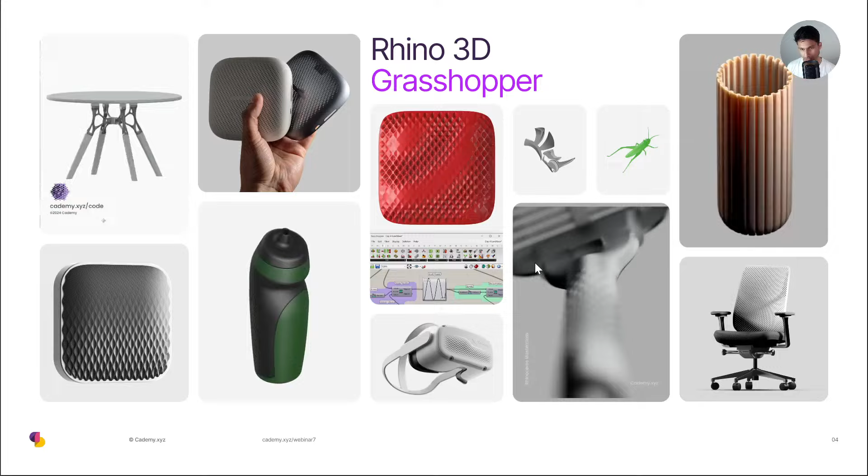Let's get started. So let me quickly introduce myself for anyone who's joining for the first time. I'm Aman, I'm from India, and I've been living in Spain for the past 10 years. And in these past 10 years, I've been using Rhino and Grasshopper as my primary CAD tool. And I help design teams create parametric textures on their products. So I've worked with BSH, Logitech, PA Consulting, and other companies to help them design certain textures on their products. And whatever I gain from doing these projects, I share with you guys over at Cademy.

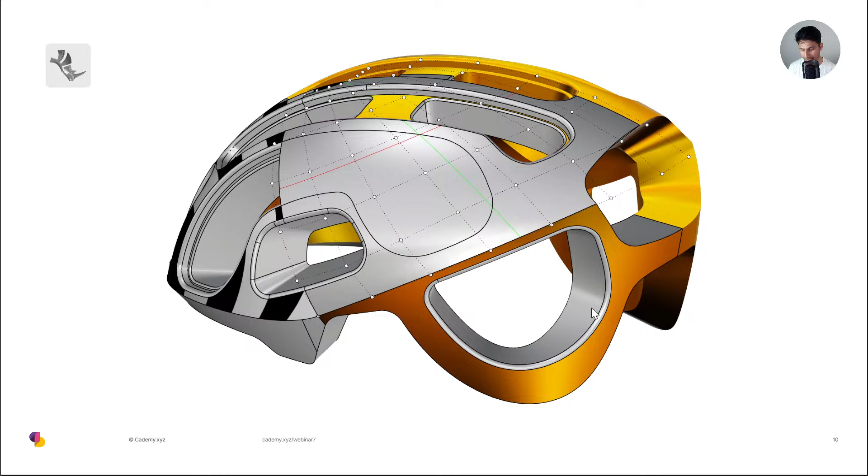Okay, we will try to create single span curves and surfaces. We will use trim and join approach. Towards the end, we will convert this model into a solid model. And after that, we will use Grasshopper and import this solid model so that we can populate it with a voxel field and then replace the voxel field with a gyroid lattice structure. We will also see how you can thicken it and then how you can export it for 3D printing in

STL format. Okay. After that, if you use Keyshot for rendering, we will import this helmet plus the gyroid structure, and I'll show you how you can do a cool reveal animation in Keyshot. Okay, so I hope everybody's ready. All right, so let's get started.

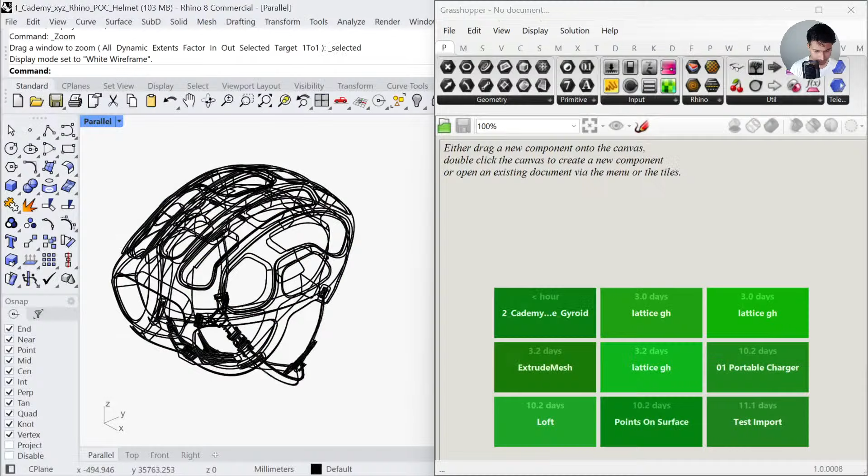So the first thing that we will do is open Rhino. I need you all to install 2 plugins. Okay, so let me open my Rhino environment. Just a moment. Okay, and we will head to the command bar and just type package manager. This is gonna pop up the package manager. Now these 2 plugins that I'm telling you are optional. You don't need them to follow the webinar, but they will be very useful if you want to quickly evaluate the continuity criteria of your surface, and later on when you're creating the lattice structure to smooth out the mesh object.

So the first plugin that we will download is called Global Edge Continuity Tool. So just write global and you will be able to install it. Yes, the exercise can be done in Rhino 7 without any problem. I have exported the file for Rhino 6 as well. Let me know if you're not able to open the file. We have a lot of time, so I can export it again just in case. But I remember I exported in Rhino 6.

Okay, so once you install the Global Edge Continuity tool, let's also look for another plugin called Weaverbird. Okay, so this is a plugin for Grasshopper. Okay, so let's press install as well. Alright, so once we have installed these two plugins, we need to restart Rhino, so that these plugins can load in the Rhino environment. So just close Rhino and then restart it. I have already installed, so I don't need to do that, but please go ahead and restart your Rhino environment. So we will use the Global Edge Continuity to check the continuity between surfaces, and then we will use Weaverbird to smooth out mesh objects.

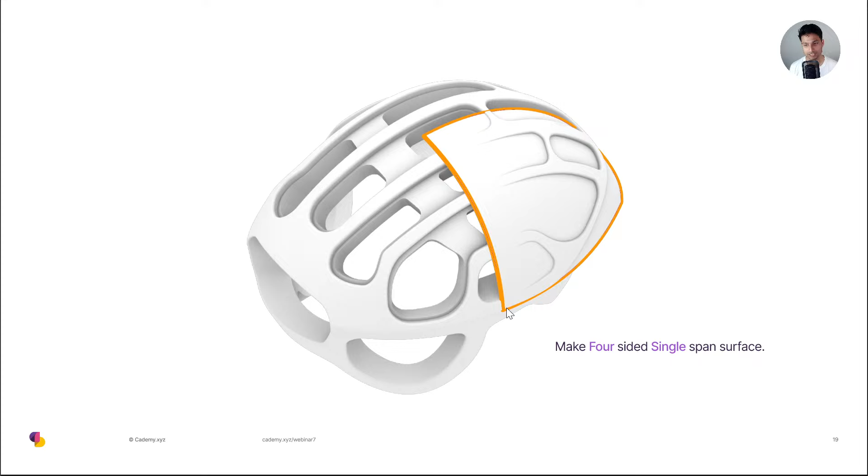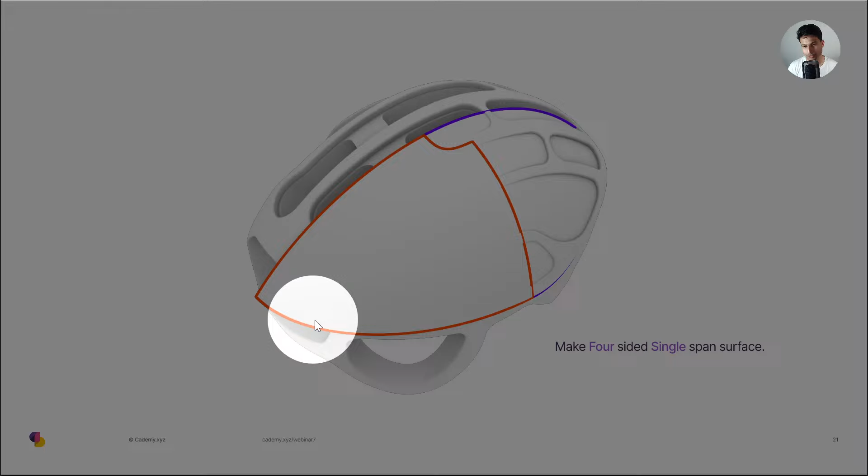Okay, and every time we are dealing with a 3-sided problem, we will try to convert it into a 4-sided problem. So here you can see, if I had to create a surface here, I had only 3 sides, one at the bottom, one in the arc, and the other side is here. So what I will do is create a new side here, and then I can convert this into a 4-sided problem. 1, 2, 3, and 4. Okay, so let's see how to execute this in Rhino. All right, perfect. So let's open our Rhino environment. Let's go to the download folder, and I'm just going to drag and drop this file in my Rhino environment, and I will open it.

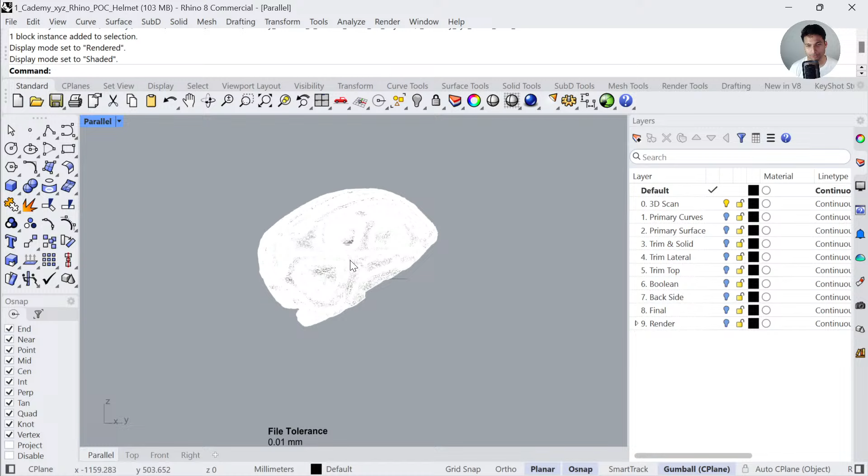Okay, so this is the 3D scan. You can go to the rendered viewport to see the 3D scan. All right, and the file tolerance that I'm using to model this helmet is 0.01 millimeter, 1/100th of a millimeter. So that is a good file tolerance for creating a draft model.

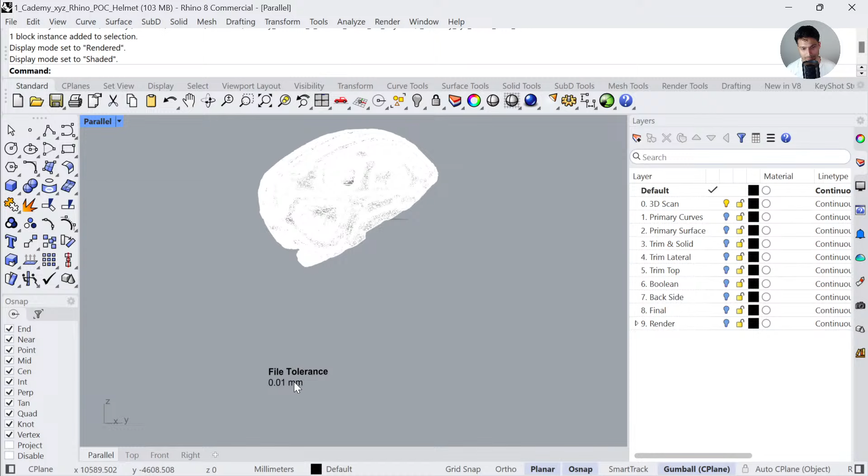If you feel challenged, you can change the file tolerance to 1/1000th of a millimeter, which is going to make this modeling experience a bit more challenging because you need to further refine these continuity criterias. But for now we are going to set it to 1/100th of a millimeter.

Now for the next step, I have created multiple layers, and you can follow each and every step by unhiding these layers. So let's unhide the first layer, where we will see how to create our primary curves. Okay, perfect. So in order to create the primary curves, we are going to evaluate the 3D scan. I will extract the silhouette of the 3D scan from the right viewport.

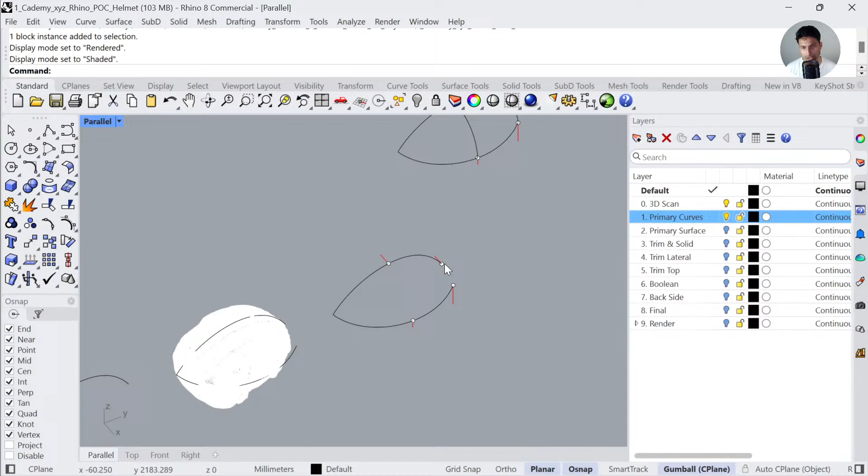I will use a single span curve to capture that shape. I will recreate the curve from the top viewport, and then I will generate some cross-sectional curves. So let's see how we can do that. Let's go to the right viewport, and in order to extract a silhouette of any object in Rhino, there is a command. I'm just going to use a random shape to show you.

There is a command called mesh. I think it's called mesh edge. If anyone knows the command. MeshOutline. Okay, I remember now. MeshOutline. I'm using different languages and sometimes I get confused. So MeshOutline will help you extract the silhouette of any object.

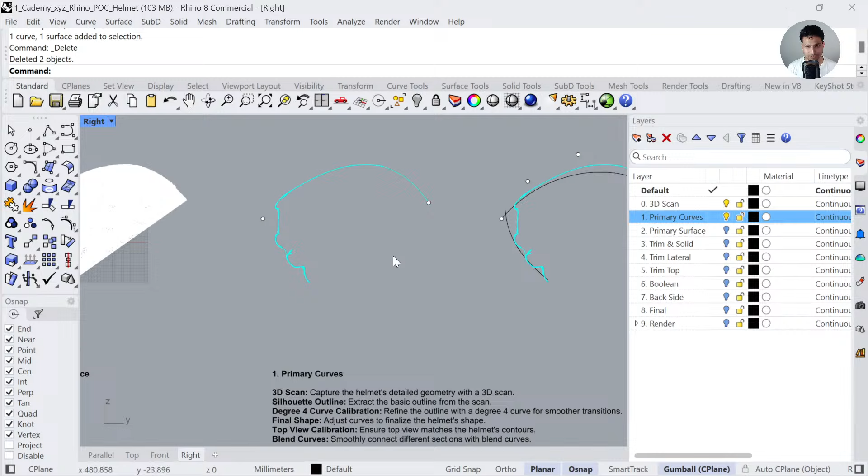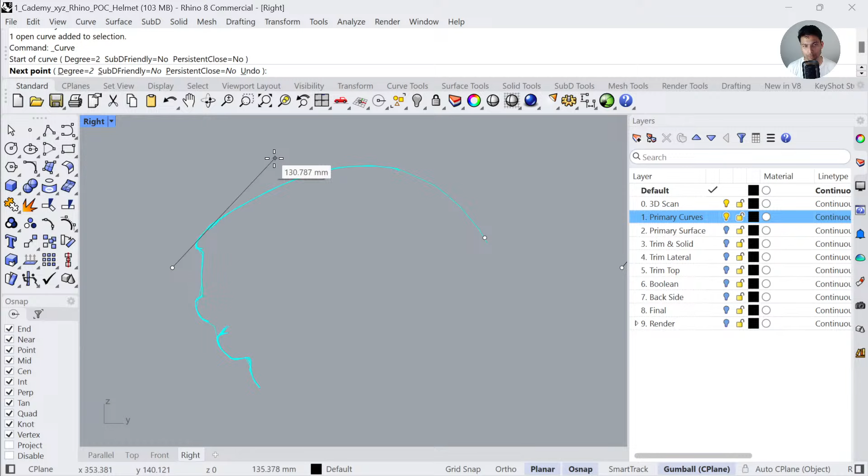All right. Thanks, Brian. So this is the silhouette, and now I'm going to create a curve between these 2 points. In order to create a NURBS curve, let's use this command, control point curve. The minimum degree that we will use is a degree 2, which means we can create 3 points. So let's create a first point here, second point somewhere in here, and then the third point. So this is a single span degree 2 curve with 3 points.

Single span basically means that it's a mathematically continuous curve. You can see the curvature continuity by analyzing the curvature graph. And this is going to create a really smooth curve, which is crucial to create high quality surfaces. Now you will notice that in this degree 2 curve, I'm unable to capture the shape properly because I only have access to 3 points, in which the first and the last point are used to anchor the curve, and I only have a third point to capture the shape.

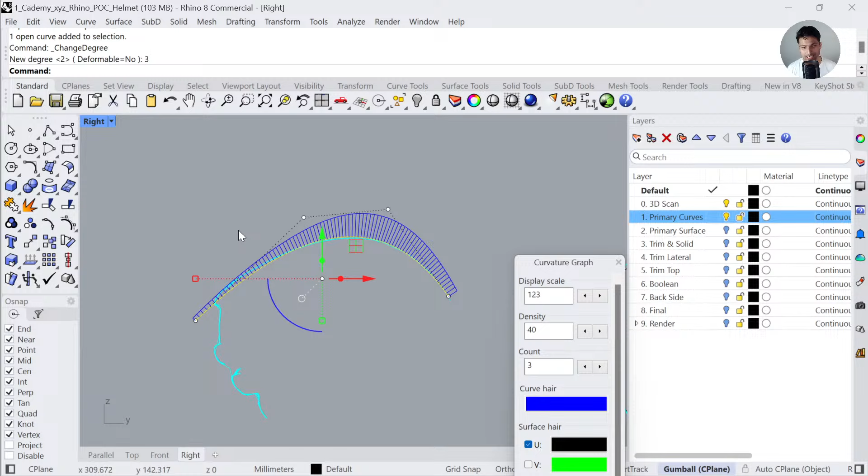So what I can do is bump up the degree. From degree 2, I can change the degree to degree 3. In a degree 3 curve, I will have 4 points. So you go to curve tools, change degree, set the degree to 3. Now you will see the curve remains the same, but we now have 1 more point, which we can then move. So let me move the curve here and there and try to capture the shape.

I think I need 1 more degree to capture that part. So let me redo, change degree, set the degree to 4, which means we now have 5 control points. So I will be able to better capture the curvature. I have already done this for you. If you just scroll to the right side, you can turn on the control points and then just snap these points to these anchor points. So this is the final position of the curve for the next step. Okay, perfect. So this is the final curve.

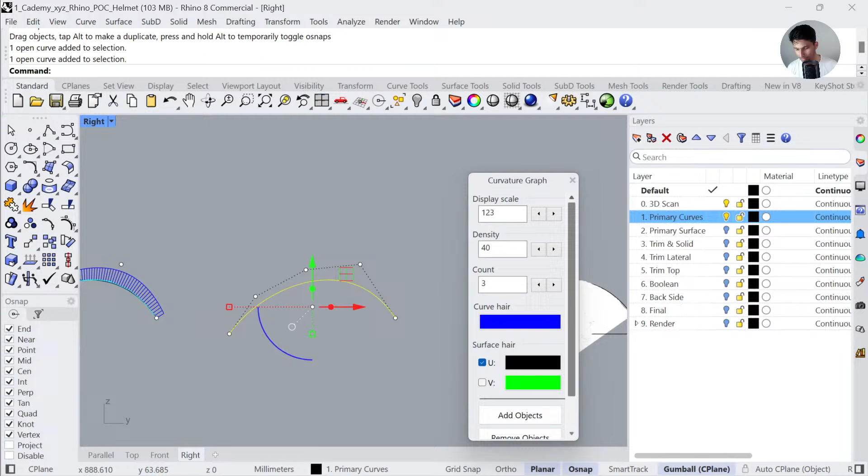Awesome. Now let's go to the next step, which is, so just a second, what I was using for scanning, I'm just using pictures and then an app to stitch it into a 3D model. MeshOutline, correct.

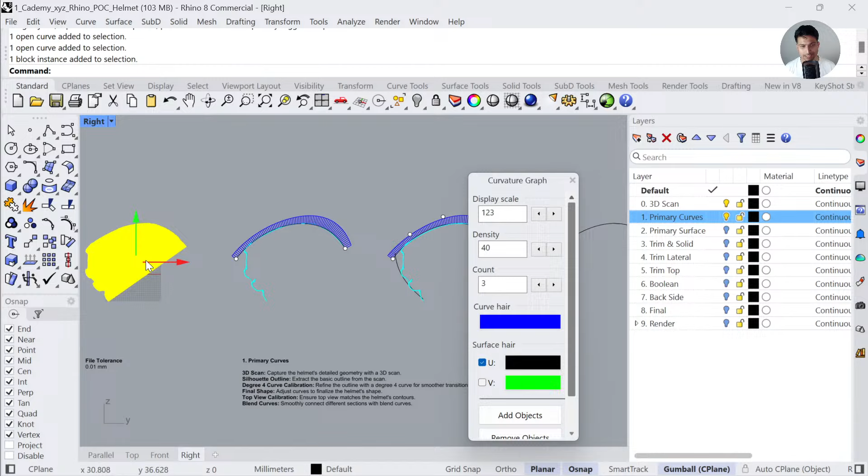MeshOutline not working, yeah, so the reason it's not working is that this is actually a block object. This is because I want to save space. If you copy a block object multiple times, the size of the file remains the same. The only thing you need to do is explode it, and this is going to convert it back into a mesh, and then you can run MeshOutline. Okay, awesome. So once we have the curve from the right viewport, let's recreate the curve from the top viewport.

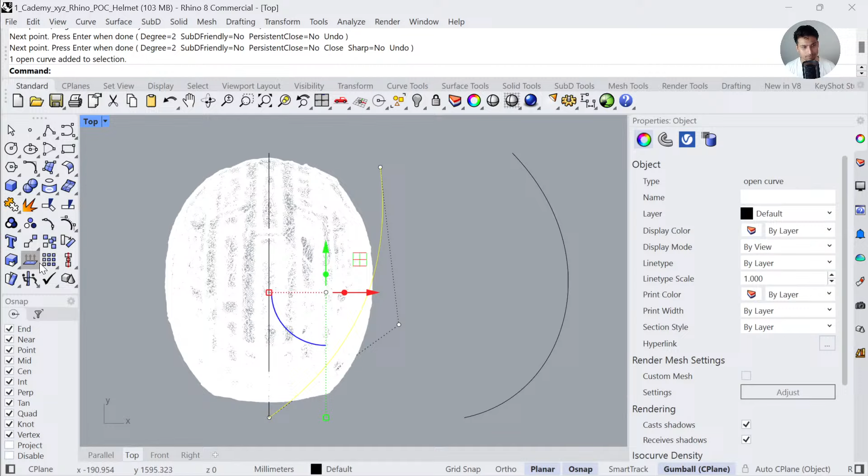Okay, so I've already done the curve here, but let me just show you the same technique. I'll isolate the curve for a moment. I will start in a similar manner, degree 2 curve, start here, first, second, third point, curvature graph, okay, and I can move these points to see if I'm able to capture the shape.

If not, I will bump up the degree to have one more control point and then try to capture the shape again. If not, I will change the degree, bump it up one more time, and I'm able to get that shape properly.

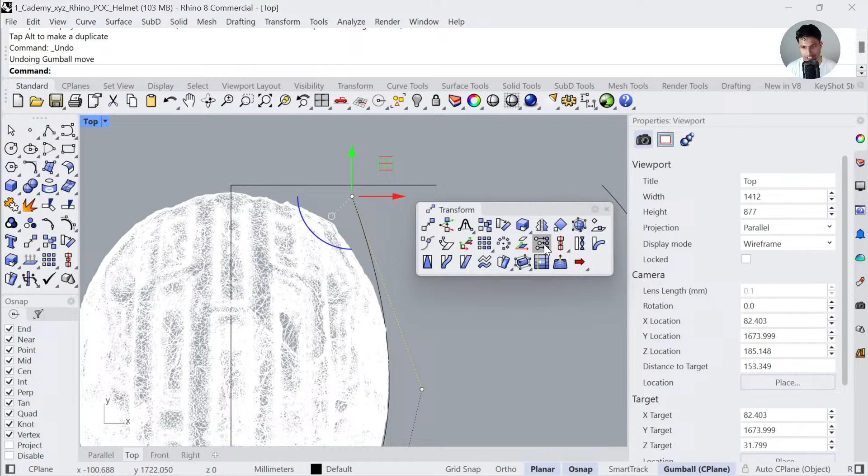Now, the last point is set where it should be, but the first point needs to be at the same height in the y-axis. Okay? So there is a special command that we can use to position this point exactly at the same height in the y-axis. So the command is called set points. So Transform, Set XYZ Coordinates, also known as SetPt, and we are going to set it in the y-axis.

Okay, and now you can see the height of that point is exactly in the same line. Okay, so this is a very useful tool to align an object, especially a point, to a specific height. All right.

What command do you use to add degree? The command is called change degree. Correct. Thanks for pointing it out.

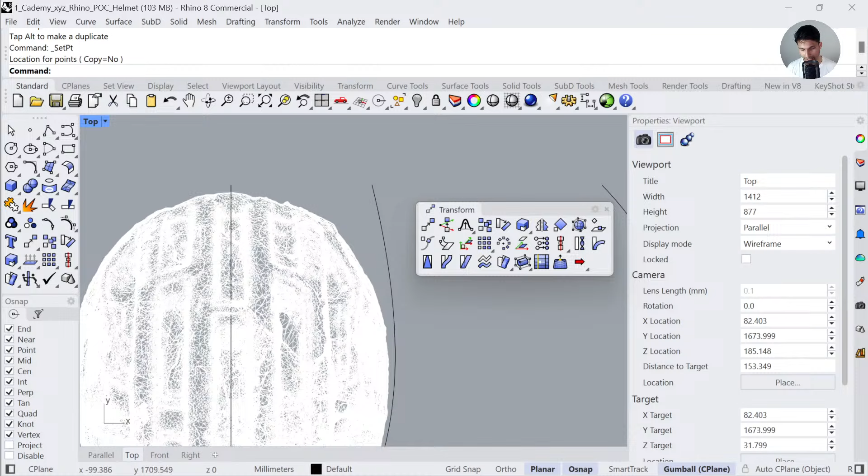Okay. I really appreciate you guys if you are able to help each other, because as I'm moving through the exercise, I'm able to read some comments. But yeah, if you are able to reply with the correct commands, really appreciate it.

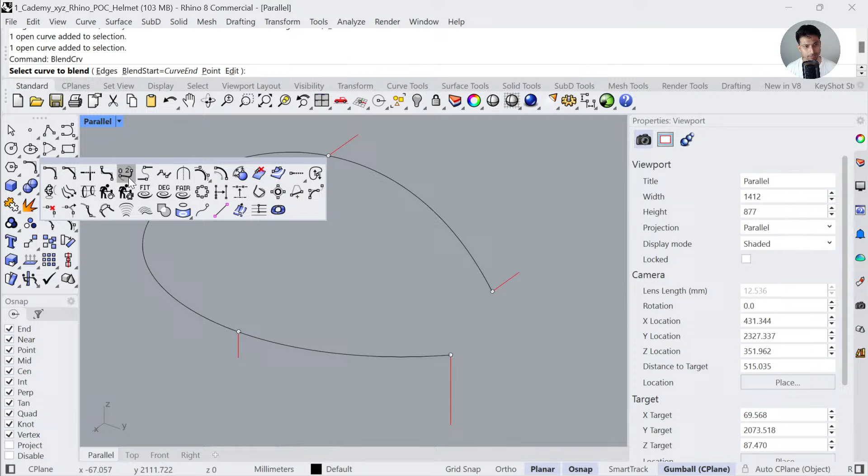Perfect. So once we have made the side viewport and the top viewport, we can now create some cross-section curves. So basically, I'm gonna convert this problem into a four-sided problem by blending these two curves and then these two curves. Okay, so you can run the command blend curve. Okay, curve, adjustable blend curve. Curve 1, curve 2. And we are going for curvature continuity here on either side. Okay.

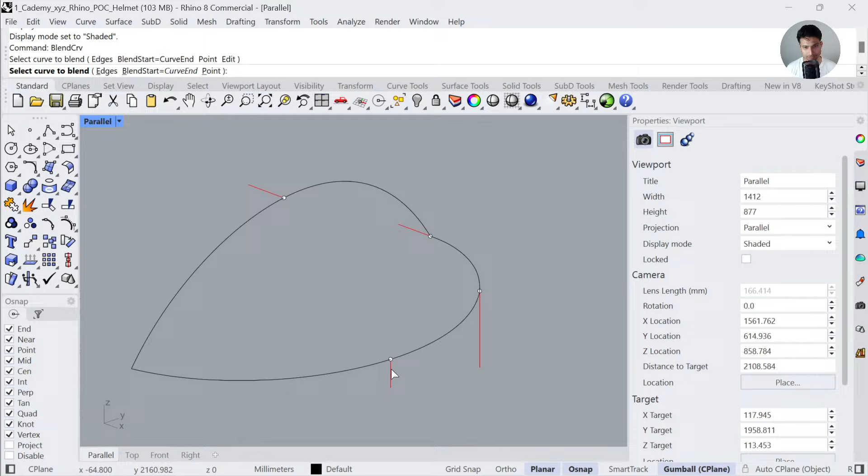And for this part, if I analyze the rendered viewport, you can see that the helmet is not creating a tangentially continuous surface here. There is like a sharp change in the direction. So we only need position continuity here, and on the top side we need tangential continuity. Okay, so at the moment I'm just gonna create a blend curve between this and this. On edge 2 we just need position, on edge 1 we need tangency, and there is a reason for that. I'll explain in a moment.

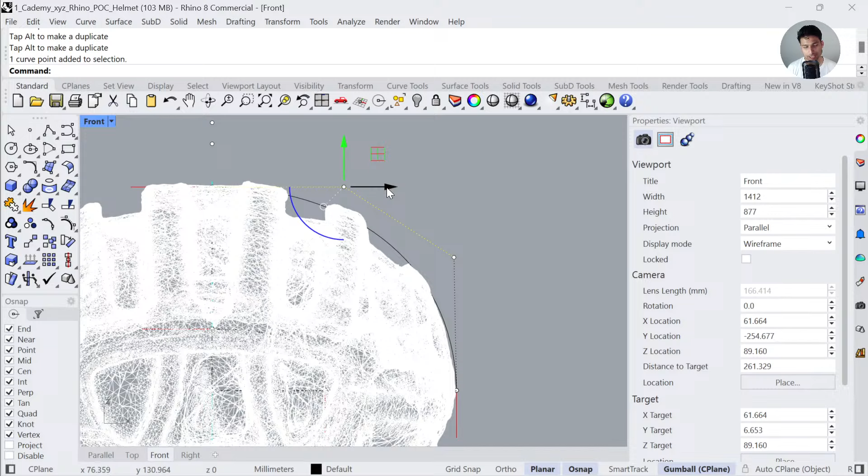So in order to further calibrate it, you can go to the front viewport, and here you can see the shape with respect to the 3D scan. Okay, so if you're unable to capture the shape, like before, select the curve, change degree, degree 3. So now you have one more point. I'm only gonna move this point freely because this point only needs to be moved in this tangent axis. Okay, because we want to make tangential continuity on the other side.

So I'll move this curve around here. I'll change the degree one more time to degree 4. So we have one more control point now. Okay, I can capture the shape a bit further. All right, so once we have captured the shape, these are our final set of curves. Okay.

In the injection process it's the parting line, and that's probably why the position, but sometimes it can also be just a design intent, okay, to make it look a bit more sporty, aerodynamic. So it could also be that case.

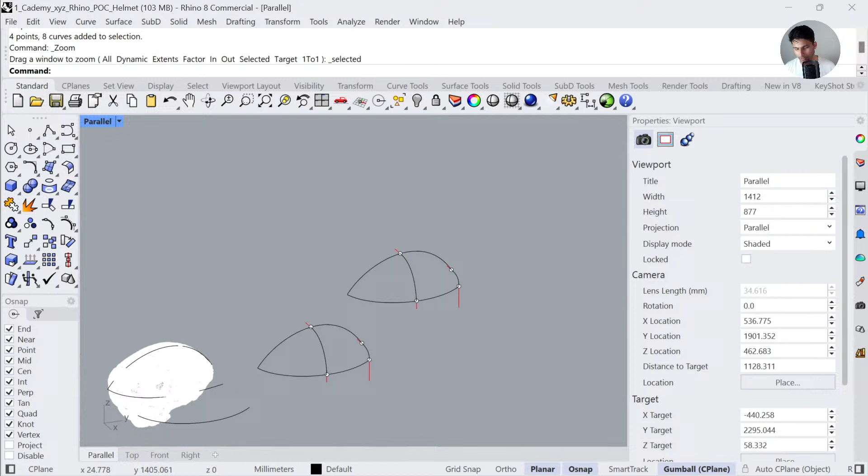Why increase the degree instead of making more points? So there is a concept called single and multiple span curve. So let's say if you create a degree 2 curve and you create 3 points, until the third point it's a single span curve. The moment you add more points, instead of a spline, now it's a non-uniform rational B-spline, which means there are multiple spans within the curve. So mathematically this curve is not that smooth.

Okay, so this is the reason we create a single span curve and change the degree while still maintaining a single span profile but having more control points. Okay, perfect. Now for the next step, let's unlock the next layer.

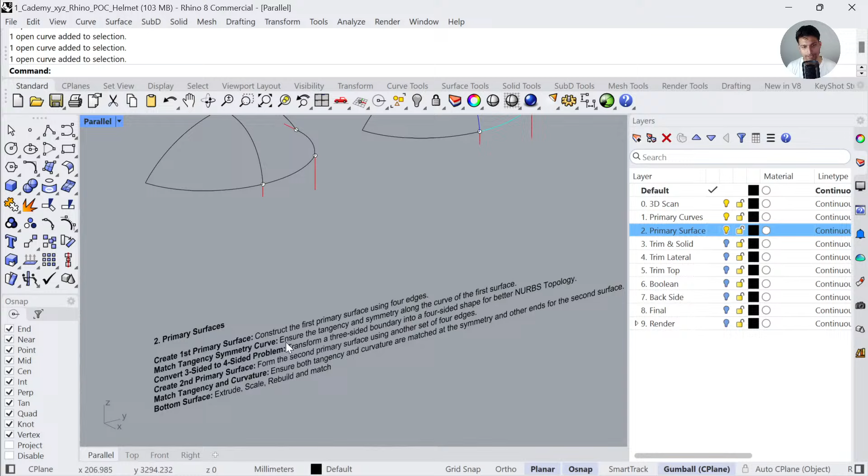Primary surfaces. So I will read you the steps. We will first create a four-sided problem. We will trim these curves into 4 pieces. Then we will create a surface. After that, we will match the surface for tangency.

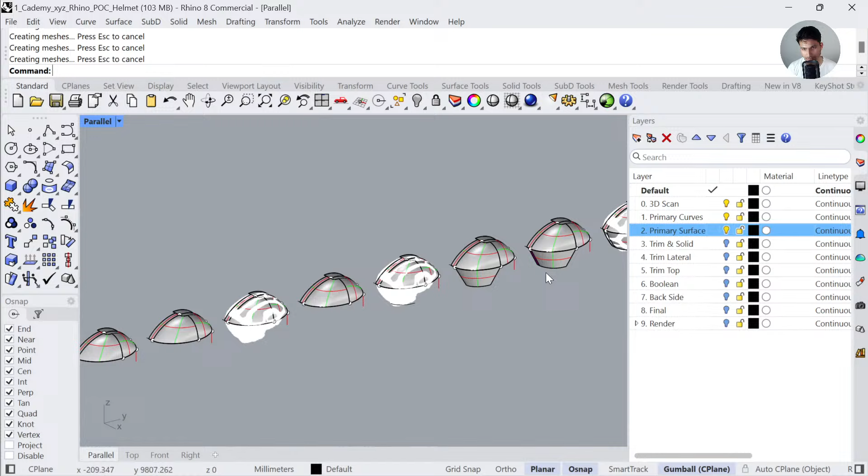And then we will convert this 3-sided problem, as you can see, we only have 3 sides, into a 4-sided problem. Ensure we have tangency and curvature continuity. And then towards the end, we will model the bottom section. Okay, so let's see how we can do it.

So the first step is to trim these curves, or split these curves into 4 pieces. So we will split this with that. You will also notice that I am moving these curves exactly by 400 units. This way I have a physical timeline. So if I want to recover any geometry, I can just create a copy and move it by -400 or +400. Right. So once you create these 4 curves, now let's convert it into a surface.

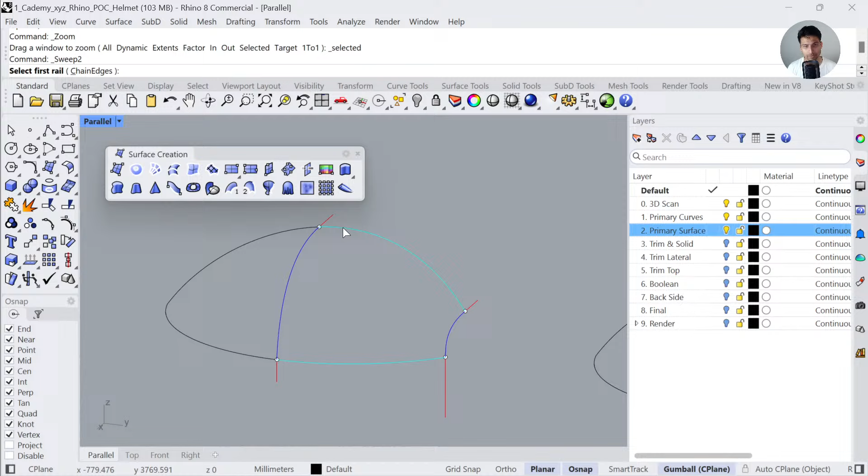Now there are different ways we can create a surface. So you might say, let's use surface by sweeping 2 rails. Rail 1, rail 2, section, section, run. Okay. If you have changed the backface setting, you might see the magenta side on this side or the opposite side. If you see that, you can just flip the surface. It's just changing the normal direction.

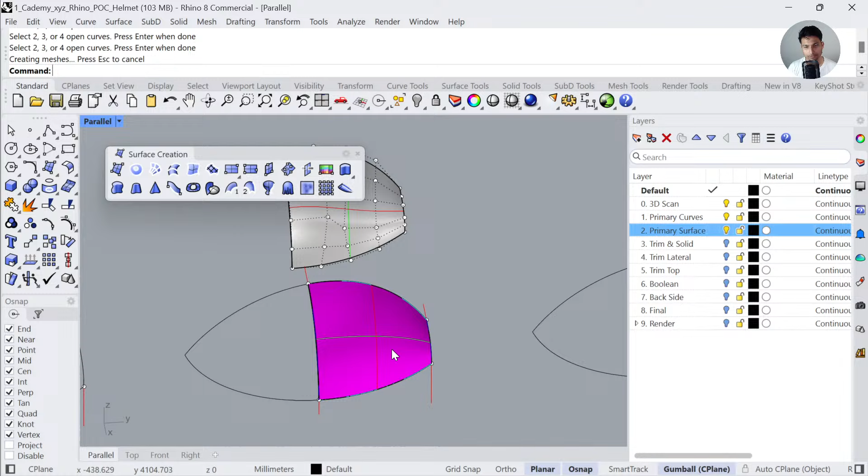Anyways, as you can see here, if I turn on the control points, a sweep command distributes the control points in a non-uniform manner. So this is not that great for creating a high quality surface. A better way to generate a surface here is using this command, which creates a surface from 4 or 3 edges. 1, 2, 3, 4. And if I show you the control points, you can see the difference between the 2 commands, right? Perfect. So this is how we will model this surface.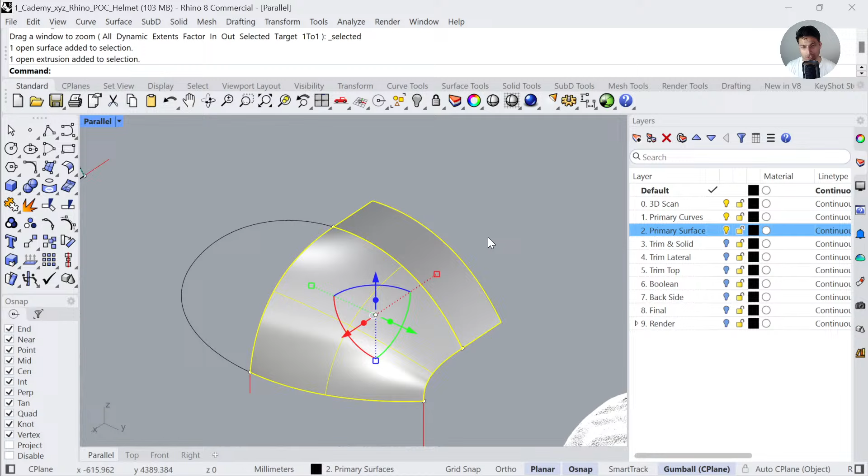Now for the next step, you can zoom into this section. We need to make sure that there is tangential continuity between these 2 surfaces. Now you might wonder, why are we aiming for tangential continuity? So anyone who is interested in learning Class A modeling, I highly recommend you check these golden rules that you can find on the Alias webpage. You can read through all of these different rules, and they will really help you understand how to create a high quality surface model. One of these rules is called ensure tangency across the center line. Let me explain why.

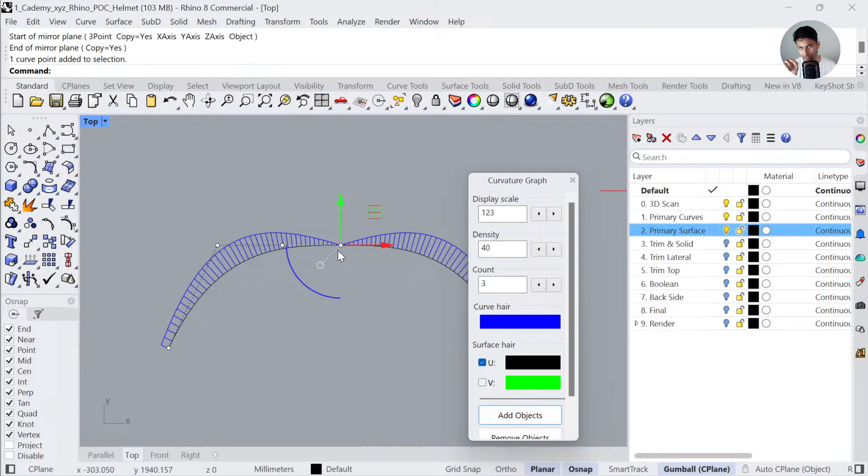If I create a curve and ensure tangency just by using 2 points, and another curve where I ensure curvature by positioning 3 points, let me show you in the curvature graph what happens. When I mirror it, because it's a symmetrical shape, can you see that exactly at the center where the symmetry line is, you get a 0 curvature zone, which means your surface will become flat for a very small fraction. On the other side, if I mirror this shape, you can see the heights of the 2 curvature graphs are the same, which means we have curvature continuity, but we don't flatten out the surface.

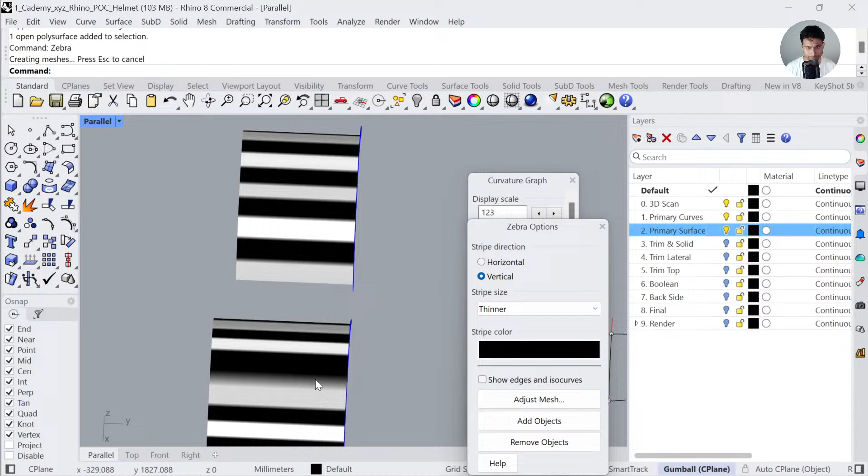So how this translates into an actual surface, let me show you. If I extrude it, and I'll show you using zebra. Can you see here? Just a moment, because I'm using a parallel viewport, so it's a bit difficult for me to show you. Let me change it to perspective just for a second. Now, can you see it here?

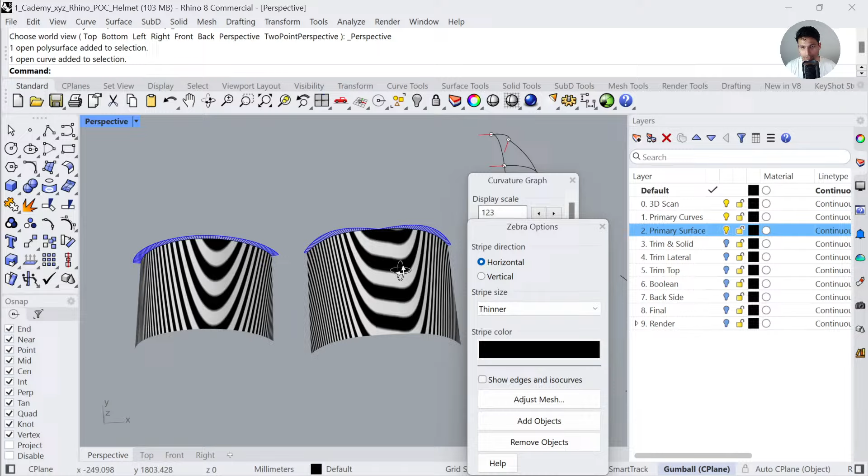This is the curvature continuity in symmetry. This is the tangential continuity in symmetry. So you can see in curvature continuity, you create a very small flat section, whereas here you transition from one side to the other in a very smooth manner. Perfect. So that is the reason we will ensure tangency on the symmetry line. Let me zoom in here. In order to ensure tangency, let me use zebra so that I can show you the effect.

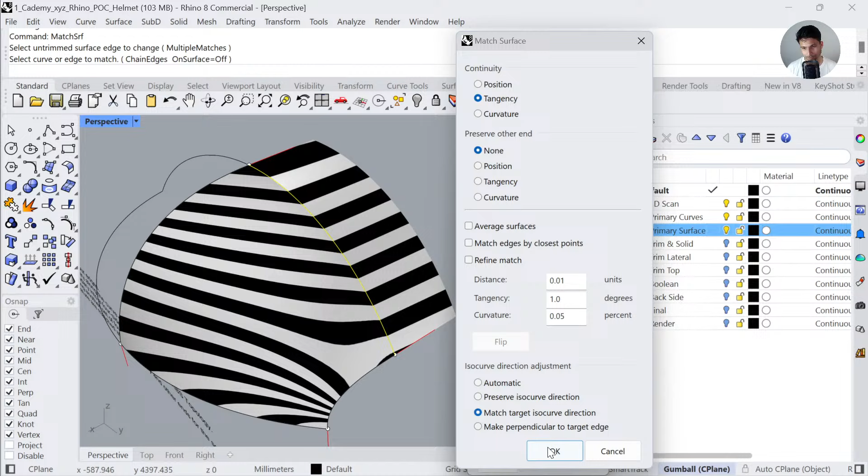You will run the command match surface. You will match this edge to the other edge. So you have position, tangency, curvature. We are not aiming for curvature, we are aiming for tangency. The other settings are set to default, none. You can also copy these values. And we are going to match the isocurve to this flat surface. So now when I mirror this surface, you can see we have really nice continuity between the two surfaces. You can also use EMAP to see the effect.

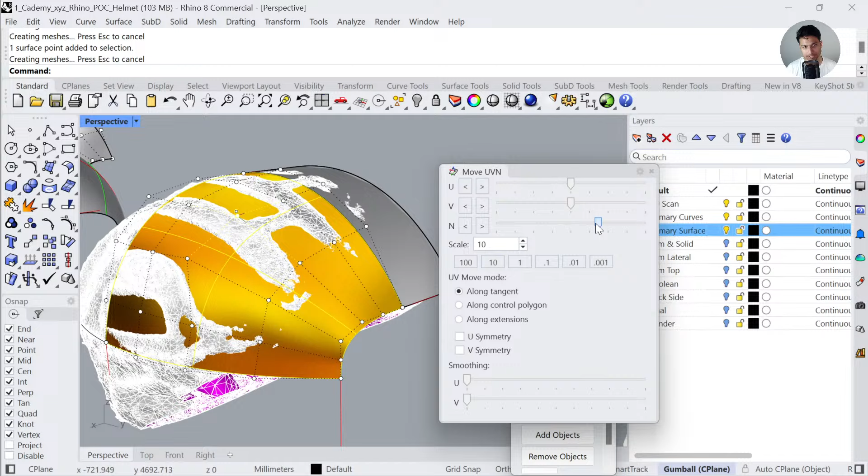Perfect. I'm also using another command called move UVN to further calibrate the surface. If you turn on the control points, you can run a command called move UVN, and then you can move these control points in the normal direction. I'm using this to further capture the shape of the helmet where we didn't have a lot of information.

Okay, so once I have mapped it, this is the end result. I will further match the tangency continuity just to make sure, and this is the end result. Okay.

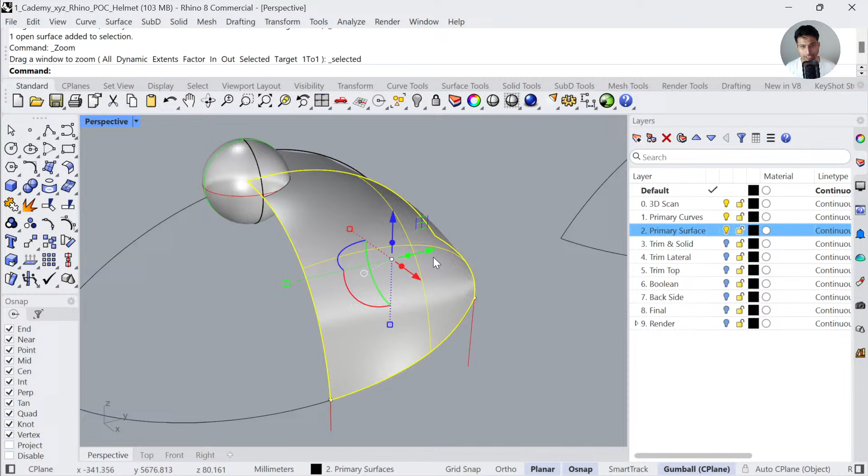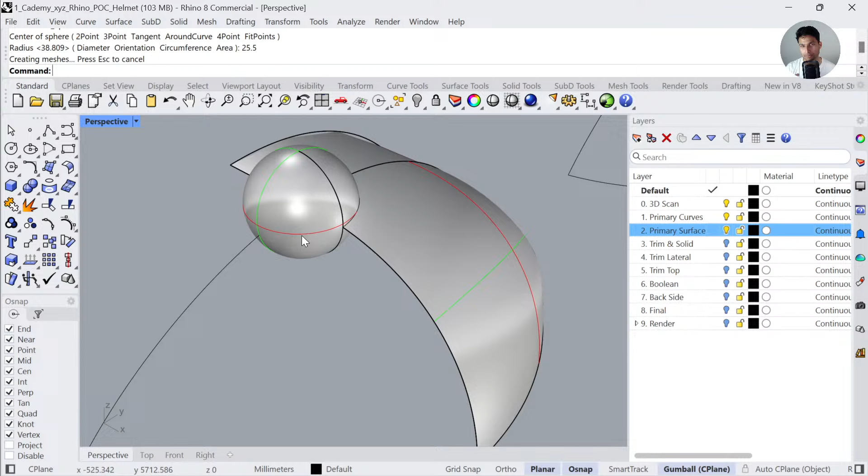Okay, all right. So now we are ending up with a three-sided problem, as you can see. 1, 2, 3. So in order to create a single span NURBS surface, we cannot work with 3 sides. We need to convert this into a 4-sided problem. So the way we can do this is by creating a sphere at this point. Let's say 25.5. You can test a couple of different radius, and then you intersect these two surfaces. So you will get this curve.

Now I will extract the isocurves of the surface at these 2 points. So run the command extract isocurve, extract it here, and then rerun the command, but this time change the direction. Okay, so now we have extracted the 2 isocurves. So you can go to the next section. Now we can split this curve with this one. Okay, and then we can split this curve with this one. All right, so we can delete the isocurves.

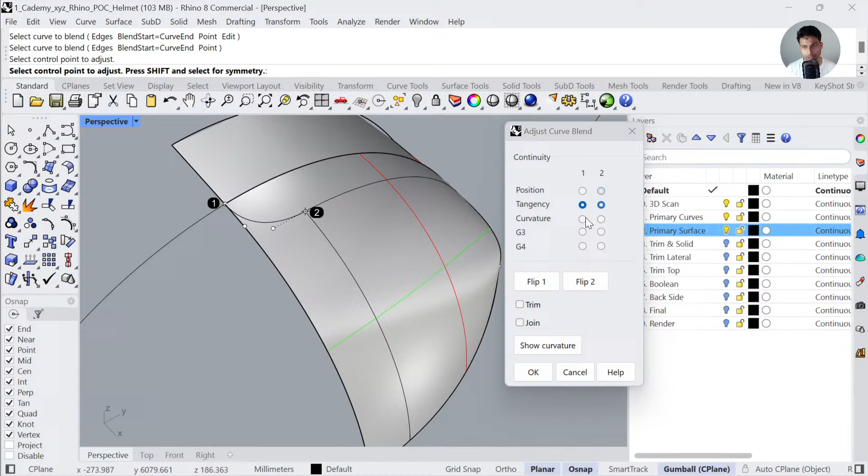Now I can blend this curve to this curve. So run the command blend curve. We are aiming for tangency continuity. Press OK. So that's how we are able to get the 4th side. Okay, so you can zoom into this section. Now we will split the surface using this and this curve. And this way I can get rid of this part. You can also delete the curve.

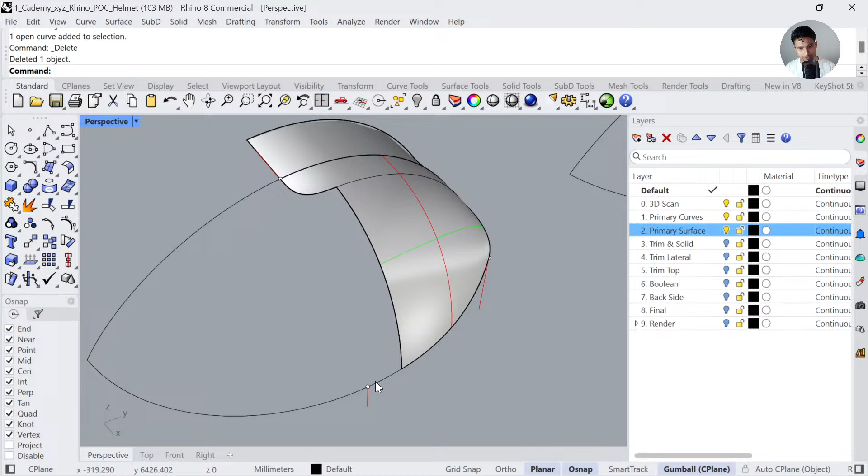Okay, now the only thing that you have to remember here is that the curve that you need in this section, you have to go all the way back where the curve was intact and bring it back to this section. Okay, so what you can do is just drag this curve until here and see more or less it's around 4,000 millimeters. So I can just copy it by 4,000 units. So it will exactly position itself there. Okay, you can further tweak it.

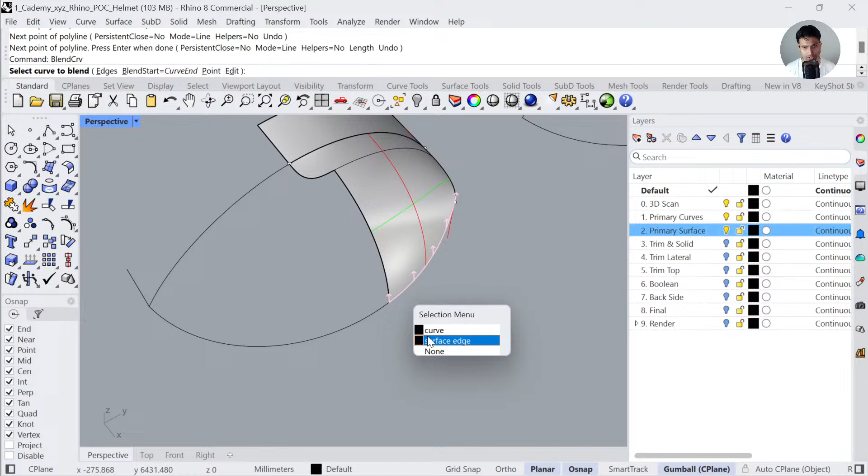If not, you can also do this. You can try blending this edge to this curve, okay, to match the shape of the curve more or less in a similar manner. Okay, so I have already done that here for you. So you can see we have curve 1, curve 2, curve 3, curve 4. Just like before, we are going to create a surface using these 4 curves. Let's flip it. Okay. And we are also going to extrude this curve to resolve for symmetry. So I have already made the surfaces in this section.

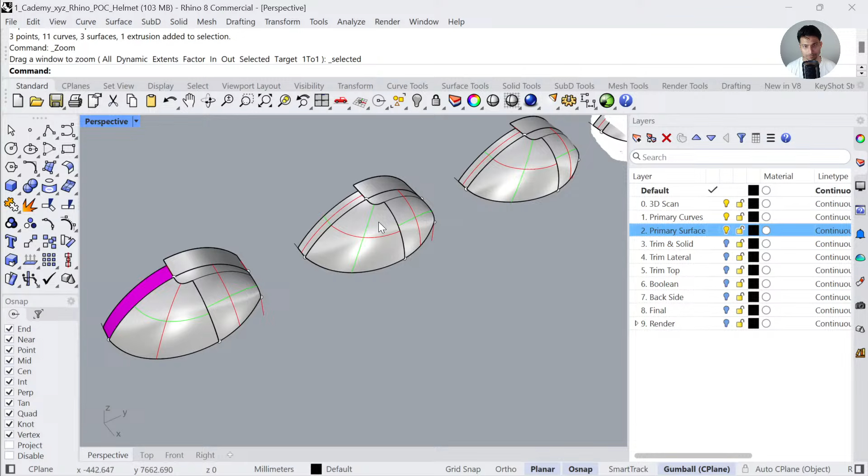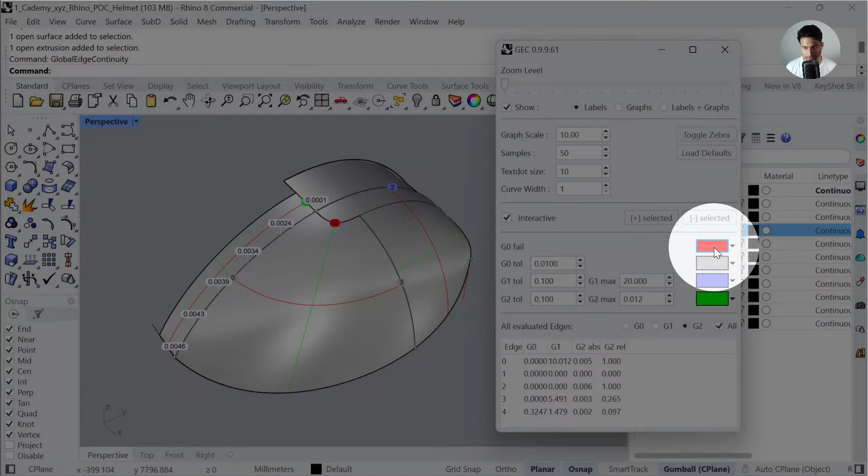Okay. Now this is where we will start to use the global edge continuity tool. So let's select all the surfaces and run the command global edge continuity. So this is going to pop up a display. Now if you're running the command for the first time, there are a couple of things that you need to change. So you can see the colors: for G0 fail, which means the surfaces are not connected at all, you will see a red edge. For position, you will see gray. For tangency, you will see blue. And for curvature, I think the default is set to white, but personally I set it to green color. Okay, so you can change that.

Now if you're unable to see some of these continuity criteria, it's because by default the only edges that you're evaluating is G0. So that is why you are not able to see green, so curvature or tangency. So you want to evaluate tangency as well as curvature. So let's set it to G2. Okay, perfect. So now we are going to match the continuity. Also make sure you're using these same numbers in the evaluation command. So 1/100th of a millimeter for position continuity, 1/10 of a degree for tangency, and 1/10 of a curvature. Okay, that's the tolerance we are working with.

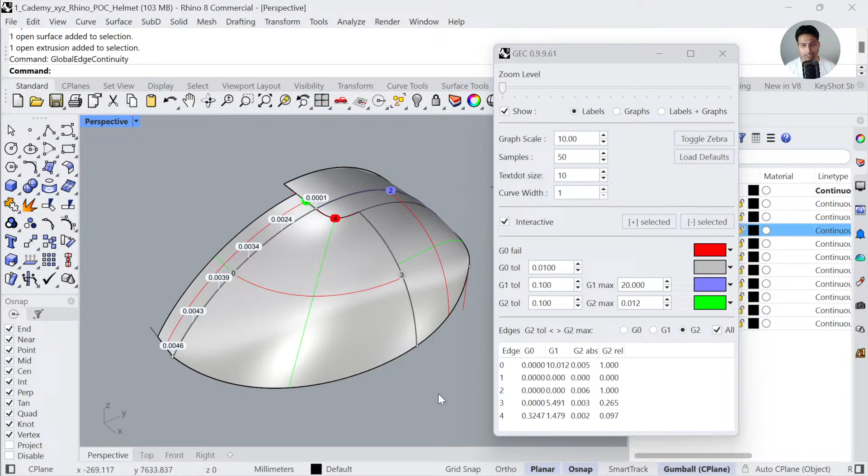So now I'm going to match this surface to this surface in tangency, so that when we mirror it we get curvature. And you can see this edge at the moment is G0 because it's gray in color. So let's run match surface command, match this edge to the other edge. We are only aiming for tangency, and we will make sure that the surface matches its isocurve direction to that surface. You can see I'm using similar values here.

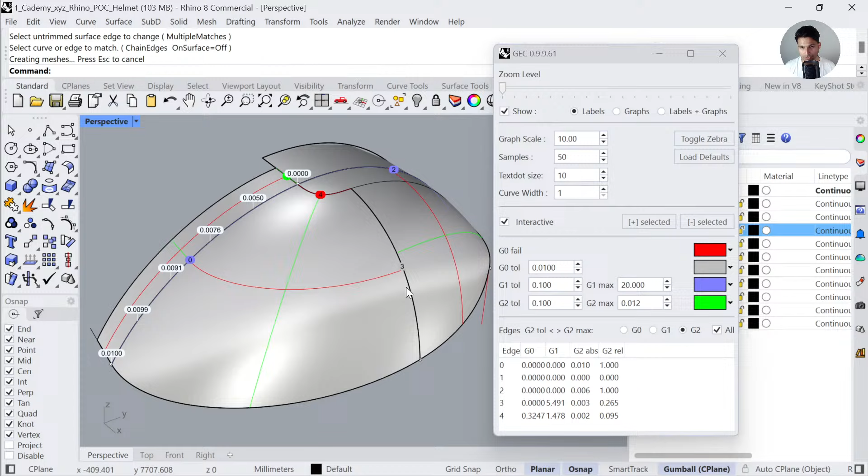Just copy the same numbers so that you are matching and evaluating using the same numbers to get the correct output. Press OK. So now, can you see we now have a blue edge, which means we have tangential continuity here. We are going to do the same thing in this edge. We have only position, so let's run match surface, match this with that. We are first aiming for tangency, and you can see we are able to match for tangency.

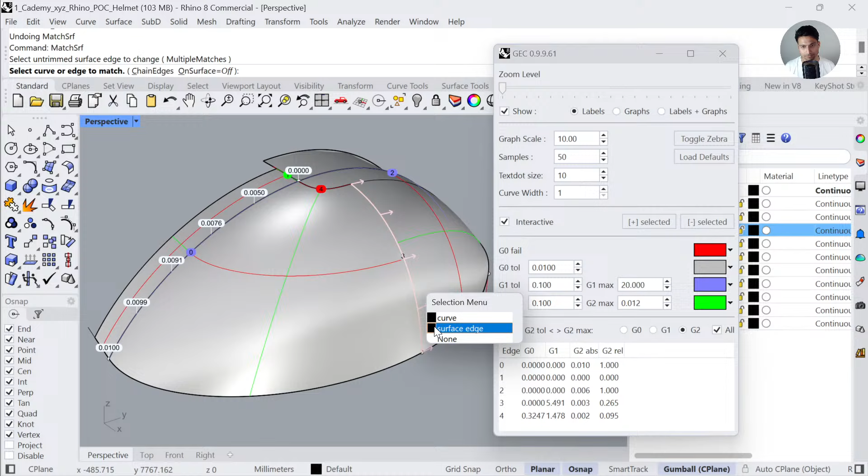And when we match it for tangency, we automatically get curvature. Can you see that? We automatically get curvature. So it's green in color. Now the last thing that we are left to do is match this edge to that trimmed edge.

Okay? So when you're dealing with a trimmed edge, you can see that trimmed edge is made out of a curve which is not a simple curve, the one that we blended. Okay, so in order for this edge to match that shape, we might have to add more control points. Okay, so let's see how we can do that.

Let me go back. So now let's run the match surface command, but before that I will turn on the control points so that you can see what's happening with the control points. Match surface, match this to that, and you will notice that if I'm trying to match it as it is, the control points are just flying everywhere. That is because it's trying to match the topology of the two edges, which is not the same.

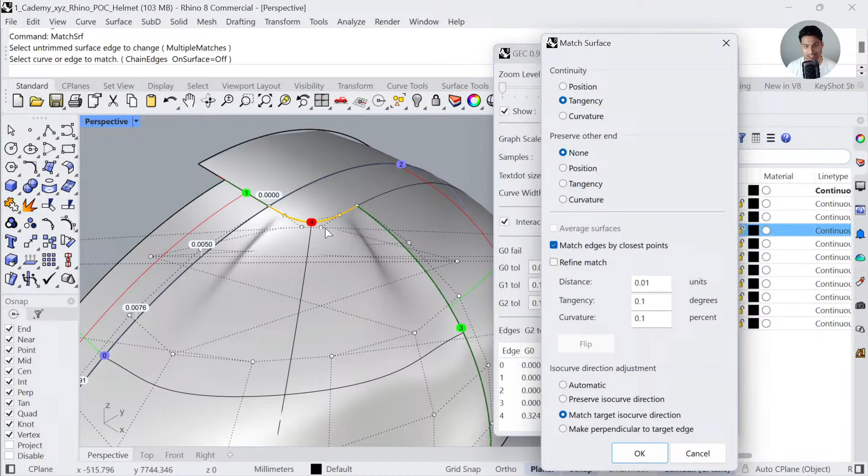So what we can do is just try to pull the control points to the closest edge possible. So let's select this option. Okay, so now you can see it's a bit better. Apart from that, we cannot ask the surface to match for the isocurve direction because these two surfaces are fundamentally different. So we will ask it to preserve its original isocurve direction. So now you can see it looks a bit better.

Let's press OK, and you can see that when I try to match it, it didn't match. Furthermore, it detached the other edges. So let me undo it. Now, instead of trying to match it with 6 control points, I will change the degree. So in the red axis, the U axis, I will add more control points. Change degree. So instead of 5, what if I use 7? Okay, so let's try to match now.

Just like before, tangency, match by closest, preserve isocurve. So as you can see now, as I matched it, it was able to match. Let me try to rematch this edge. Let's see if we have luck. Okay, so I was able to rematch this edge. So I have already done this for you guys. You can check it here.

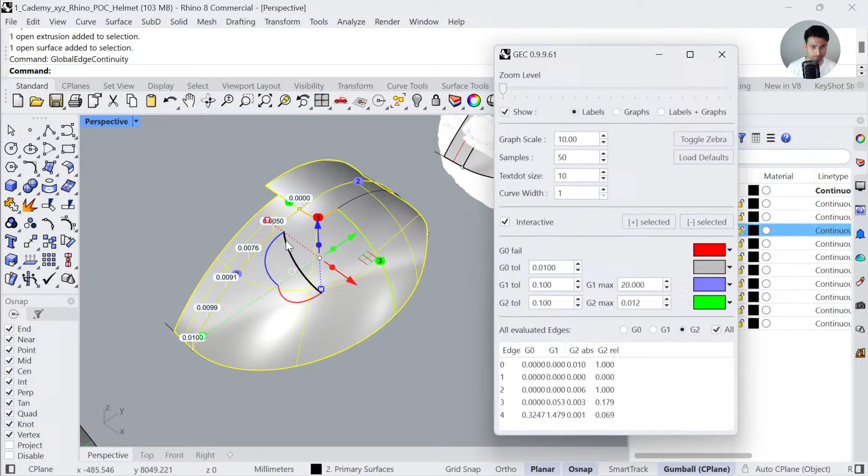Let's close it and rerun the command. Okay, I think I have done it here. Just a moment. All right, there you go. So here you have curvature, curvature, tangency on the symmetry line.

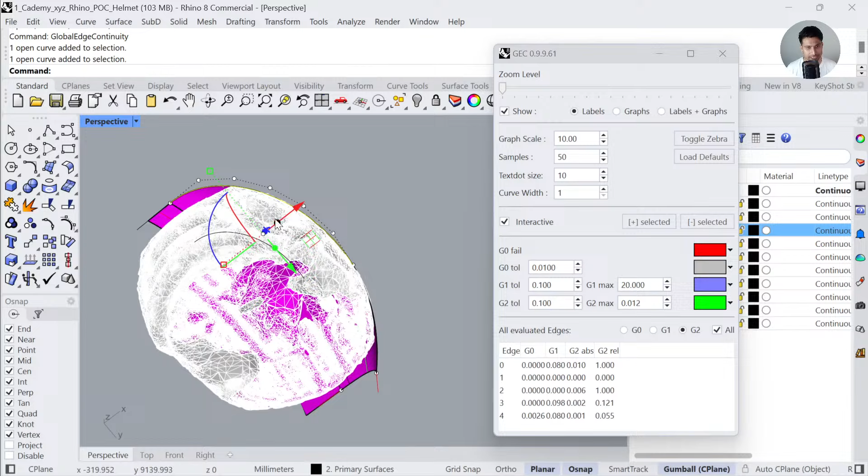Now for the bottom section, I'm just duplicating the edge. I'm scaling it and then moving it down. Okay, and then we can loft these two curves to create a simple surface. Okay, so once we have that surface, I will also correct the edge.

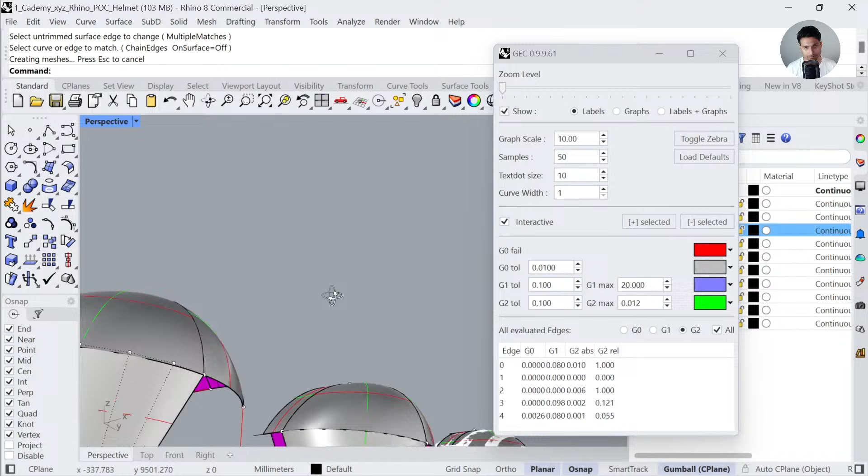So you can just turn on the control points, duplicate the edge, make sure it's aligned to this axis in the X direction, and use that curve to maintain a symmetry line. So match surface, match this with this, tangency. And then the rest is just trying to capture the shape.

I'm also moving the 3D scan between phases so that I can easily see what's happening here. For example, let me move back the 3D scan. If I turn on the control points, I only have 2 points, so I won't be able to capture this curved shape. So let me change the degree to degree 2 for the V axis. So now you can see we have one more set of control points.

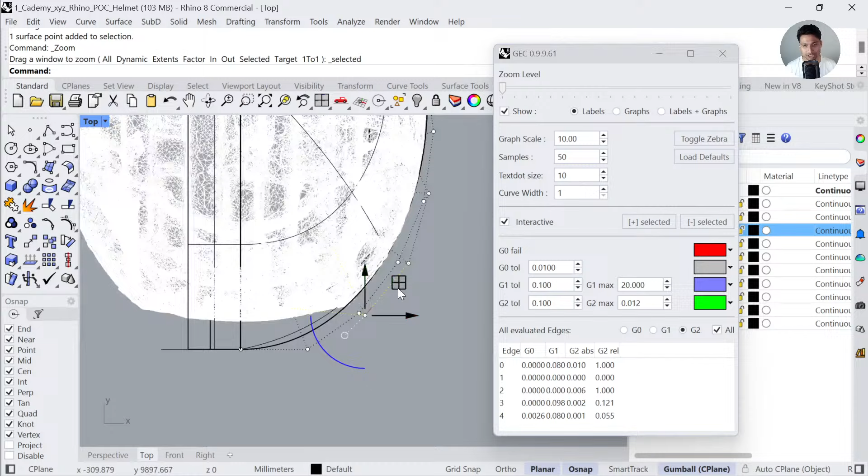So I can move these points manually so that we are able to capture that shape. Okay. Of course, try to distribute the points in a manner where you're not exaggerating the movement of the points. Okay, so I'm trying to create like a uniform distribution of the points. So if I'm stretching it too much, I'm just moving it back. Maybe I have to rethink by adding more degrees and trying to capture it in a better manner.

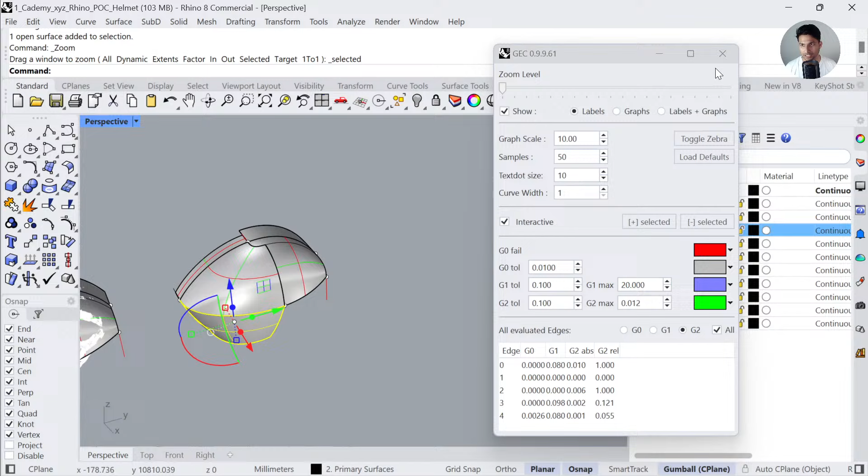So that is the end result. So with all of these, what we are left with, let me rerun global edge continuity, is curvature, curvature, position. You can delete everything except these 3 surfaces, and then we can mirror it.

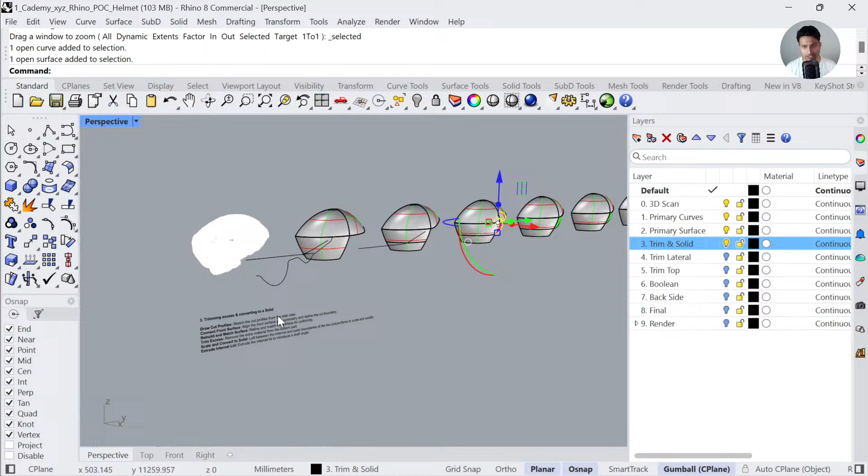Okay, so if I show you in Rhino, this is the end result. Okay, let's unhide the next layer. So now we are going to trim the excess parts. So we are going to draw the profiles. Okay, split it. We will connect the front part here. Then we will match the surface. We will then trim the excess part from the bottom. Okay, and then we will convert it into a solid model at the end. So let's see how we can do that.

Let's go to the right viewport. Okay, you can use this button to zoom into that selected object. So I'm creating these curves using reference image or reference 3D model. Okay, then I'm extruding it and using this curve and projecting it here. So you can also run intersect or project to get that curve. Okay. Now I will split the surface with that curve.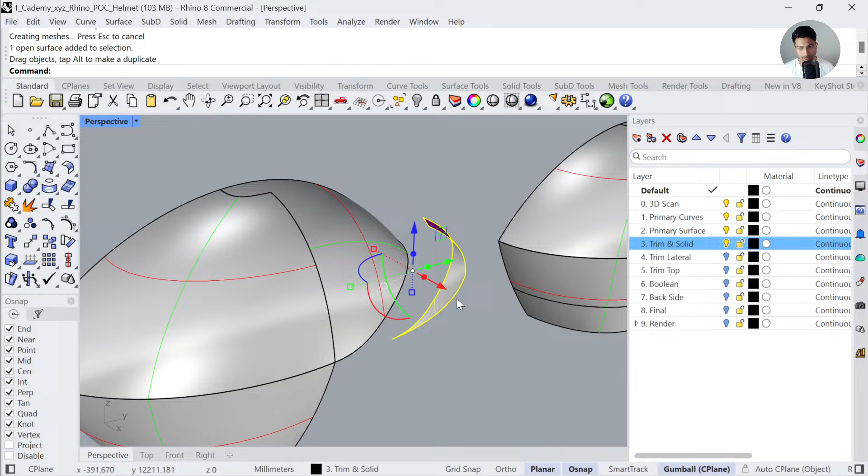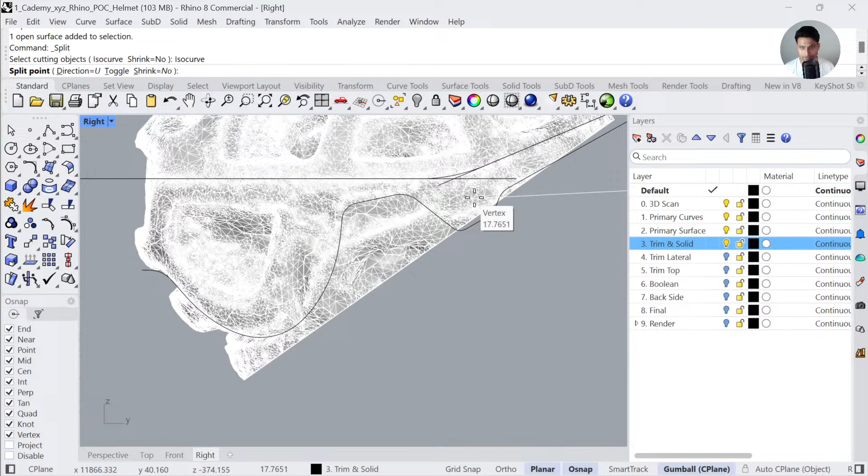Okay, I also created another curve here, and I'm going to create a surface around this area. So I'm breaking this surface by splitting it on these isocurves around here. Okay, you can use the reference 3D scan to see until where we need that part. So I think until here it was fine for that surface to continue and attach here. Okay, so I'm breaking it around this part. So I have this edge, which I can then blend with that edge.

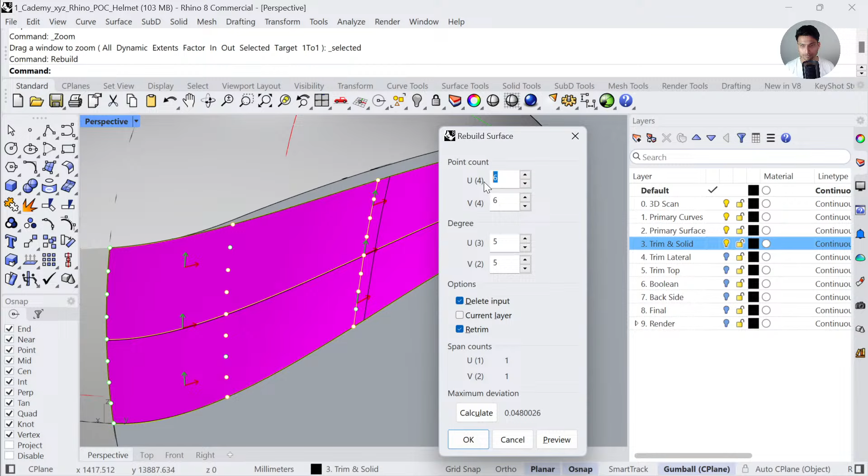Okay, so you can run blend surface, blend this to that. So let's use the lowest one, tangency, press OK. Right, and then in order to connect this with that trimmed edge, I'm rebuilding this surface with a lot of control points. So I think I'm rebuilding it with 6 control points, for degree 5 and 5. Okay, you can flip it, and now we can match this edge to that edge.

Match surface, position, we just need a position continuity, match by closest. Okay, because it's a trimmed edge, so whenever you're trying to match a trimmed edge, you always use the closest option. Okay, and we are going to preserve the isocurve direction. Press OK, and now if we are able to join it, we can show edges to see if we have any naked edge. That's great, there are no naked edges.

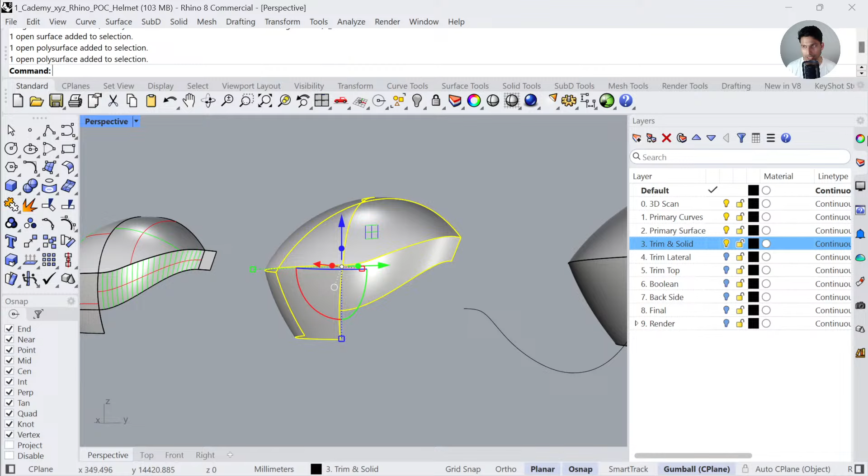Okay, so this is what we end up with. You will also notice that here you won't see these isocurves, because in Rhino we have a setting where we can disable the preview of the isocurves. Okay, now lastly I have this other curve which we can extrude and then use this extrusion to split the part into 2 pieces. Okay, that's the end result.

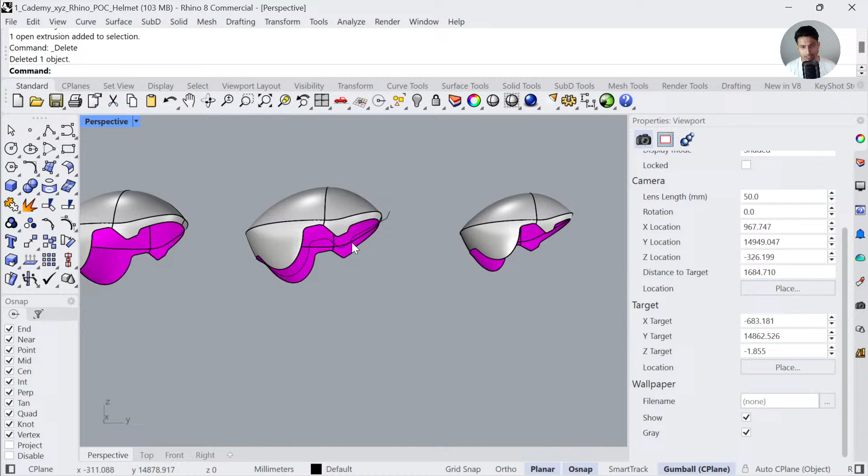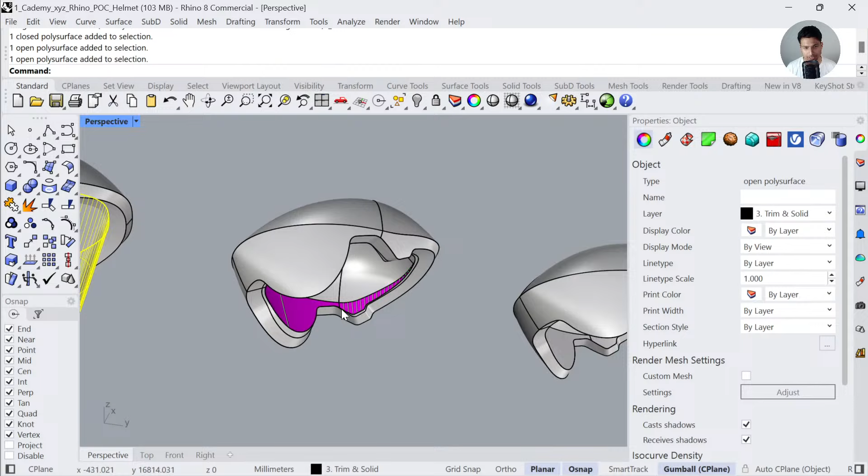And in order to create the internal section, I'm just copying and scaling it by 0.8 units in the center, like that. Then I'm duplicating the edges, join it, redo the duplicating the edges, join it, and then we can loft these 2 curves so that we can stitch it as a solid model. Okay, now this part is very concave, so what I can do is further extrude it and then use that surface for Boolean difference. This is just to get a bit more space in this axis.

Why do we not offset the surface? You can technically offset it as well. It's just that if you offset this polysurface, let me show you. Surface tools, offset. Let's say if I offset it by -10, just a moment, why is it not offset? Flip all, yeah, 10, sorry. You don't set it -10, you flip the normal direction. Okay, and convert it into a solid model.

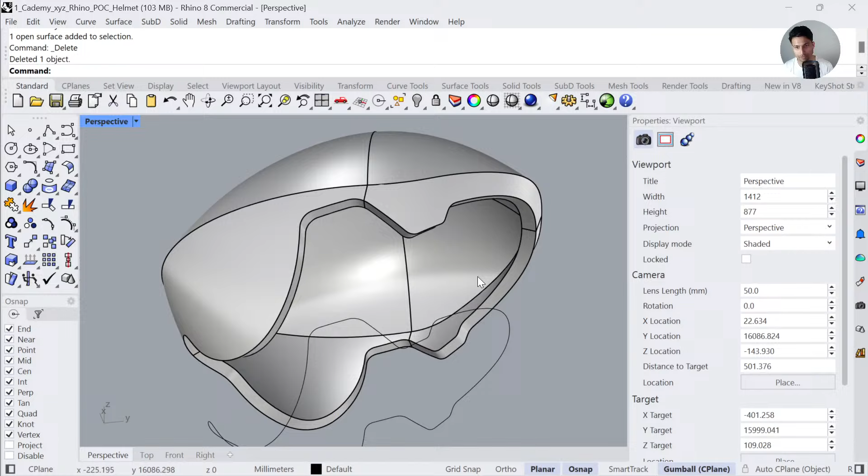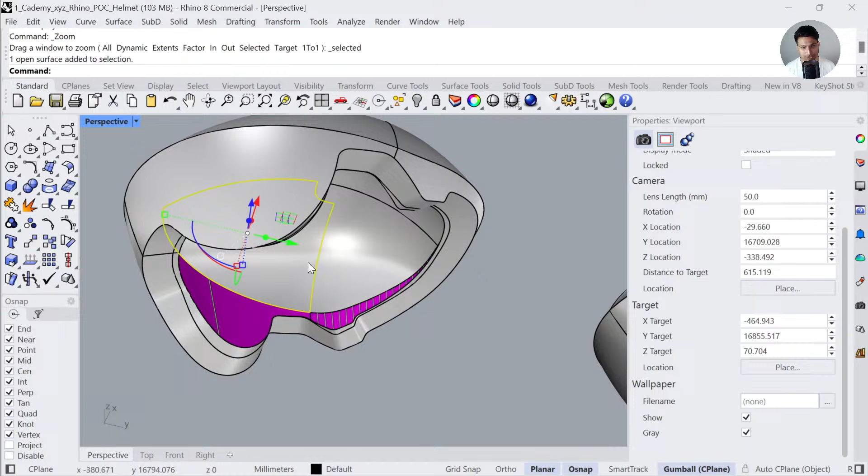Yes, technically it works, but you can see now if I show you the isocurves of that offset part, it's going to be made out of way more complex surface. Not bad, but now if you see, we have a similar topology outside and inside. Okay, this is just to keep the surface quality cleaner on the inside. So this is the end result. Okay, we will just join everything together as a single solid model.

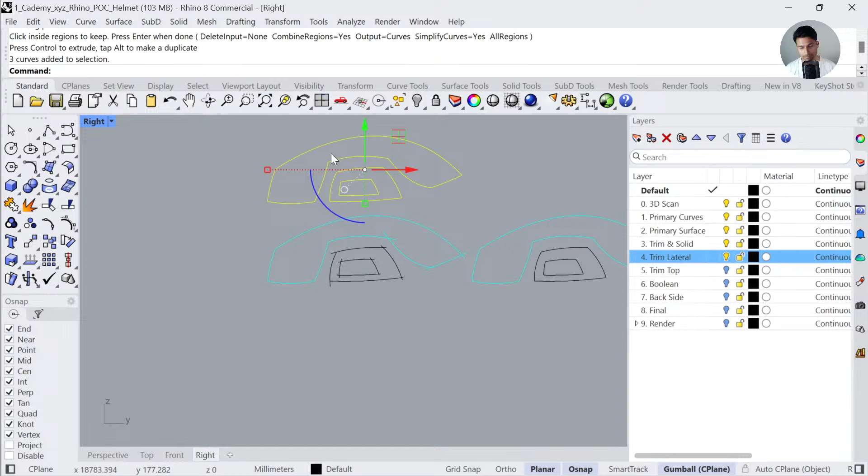All right, now let's go to the layers, layer number 4. Now in this layer, we will create the cut holes. Let's go to the right viewport. We are then copying the shapes. Okay, so we will first get rid of the excess parts. Okay, if you know, there is also a tool called curve boolean which you can use. So it will automatically give you the intersecting curves. Okay, I'm creating a couple of additional curves and then I'm filleting the corners to get these shapes.

I'm also then creating these lines and extruding, expanding them so that I can create the internal cutout section which will go through the helmet, and then an outer cutout section which will only be a superficial cutout. Okay, and you can do that just by offsetting the curve. So I'm offsetting this curve by I think 2 millimeters. So this is the end result.

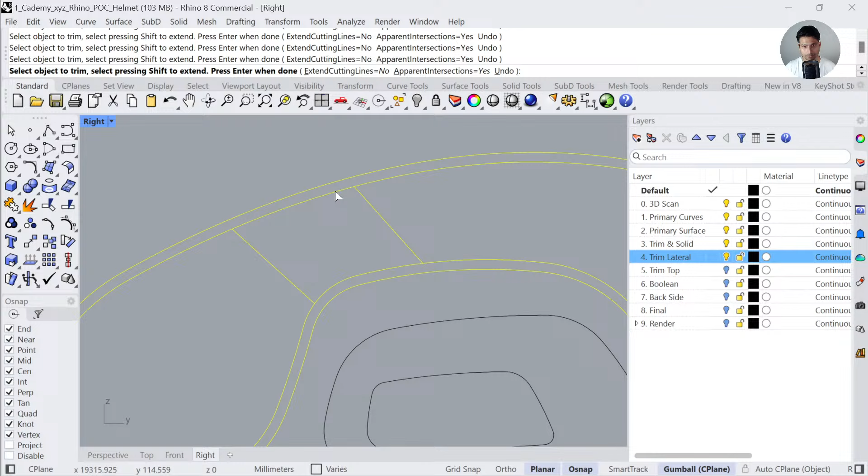And finally fillet these corners. Okay. Is it ever an issue that you are working far from Rhino's origin now? No, there's not such an issue if you're far from the origin. Just make sure that you select the geometry and use this option to zoom selected, which will reset the camera center to this selected object.

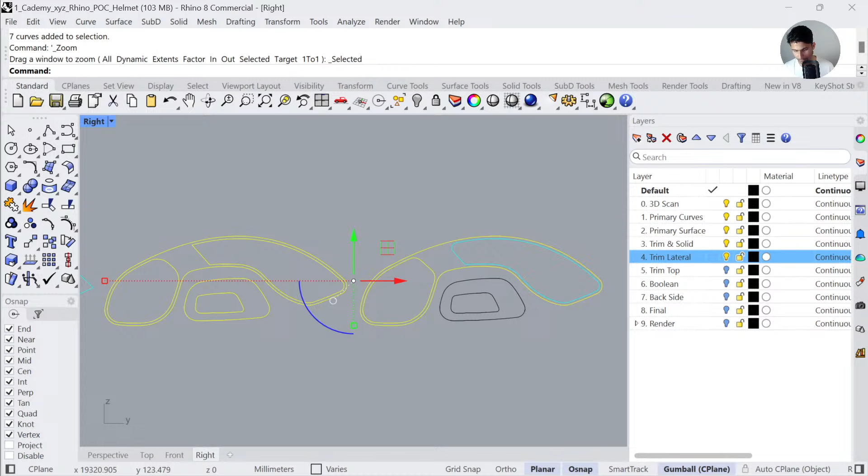As a reference, making these curves that you mentioned, what is the most accurate way possible apart from referencing with the eye? The direction is wrong. Why not offset? Oh, okay. All right, I'll address these questions just in a moment.

All right, so the last part is just taking the helmet and I'm exploding it and just using the top surfaces and moving it sideways. Okay, so I will project this thing here and then the smaller one on the smaller surface. So we can do this here. Let's go to the right viewport. Project the bigger one to the outer surface and then the smaller one to the internal surface.

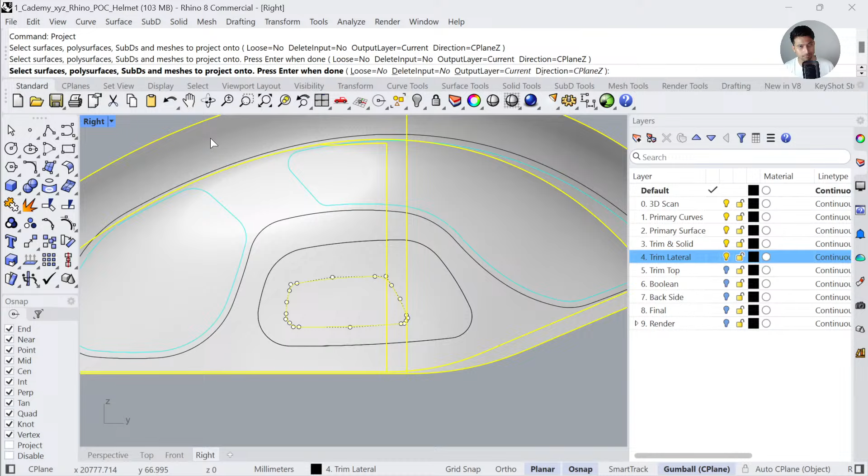Okay, so as you can see here, we now have these two curves and we can split the surface using this curve, this one with this curve, and you can create the hole and finally loft it to connect the two sides and join it all together. Okay, so that's what I have done here.

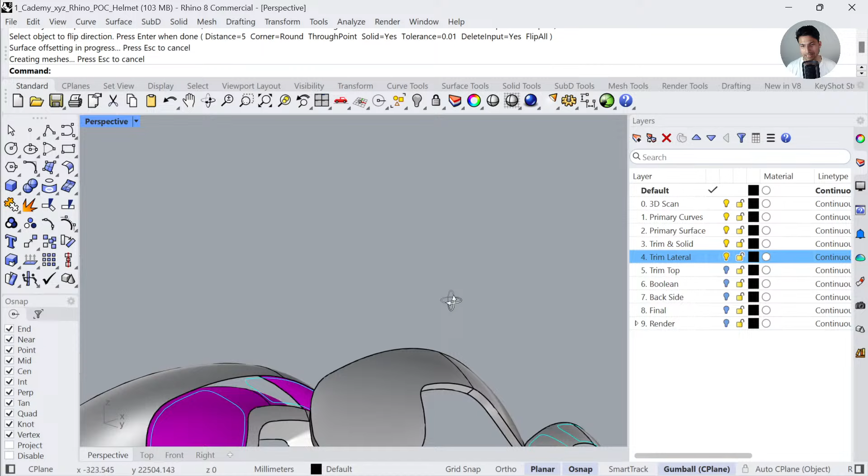Then in order to create these cutout shapes, we will project these and these. So I will split this from here and we will offset these by -5, so that we can then use this solid to remove the material from the helmet.

And I will offset these by -50, so that it goes through the complete helmet for the vent. Right, so these are the 3 shapes we need for the perforations on the lateral side. Now we have a couple of perforations on the top side as well.

Why not rebuild the projected curve before split? No, when you project a curve on the surface, this is something that we call COS, curve on surface. When you rebuild it, it will actually not be on the surface anymore, and you won't be able to use it to cut the surface. Okay, so you cannot rebuild a projected curve and use it to split the surface.

Alright, so for creating the top shapes, let me zoom in here. Okay, unlock this layer. So from the top viewport, in the rendered mode, you can see I created the reference curves, created these additional curves. So you will first get rid of these intermediate sections, which you can also do by curve boolean. And then you will fillet the corners.